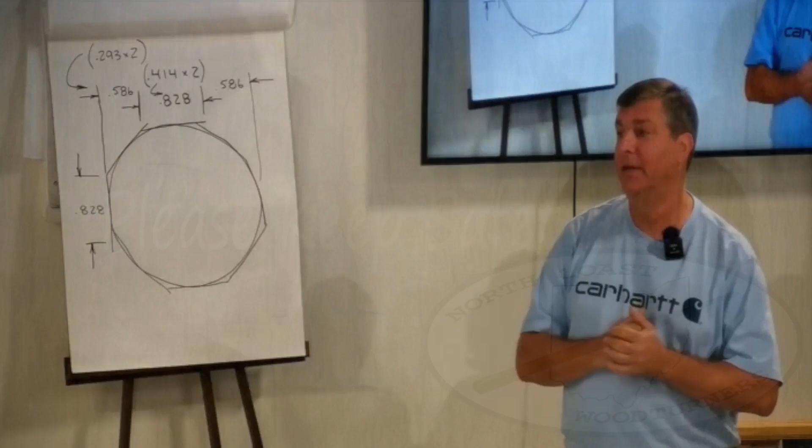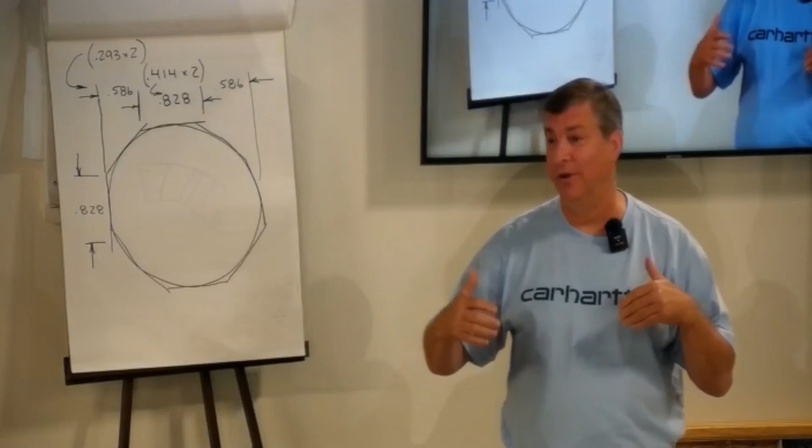I am from Erie, Pennsylvania. I am not a professional woodturner - I'll repeat, I am not a professional woodturner. So if you've had Stuart Batty or Nick Agar or Johannes Michelsen come in, they always talk about how they were an apprentice and how they grew up and learned. I've only been turning for about 5 years, but I want to give a little bit of background. I have been doing some woodworking, so I'm going to talk to this, but I wanted to give a little background on myself.

Again, I'm not a professional woodturner, I want to calibrate your expectations. But I've been woodworking for 45 years, starting in high school. I'm the president of Presque Isle Woodturners in Erie, PA. We have about 75 members, so we're a growing club. I'm taking great notes about your wonderful setup here and all the things you're doing to share best practices.

I attended Penn State University. Sorry, I know I'm in rival country here. If you go to throw tomatoes, wait till I'm behind the glass. Okay.

I went to Penn State. I have a Bachelor of Science degree in Industrial Engineering, a Master's in Manufacturing Engineering. That was my career. I worked at a company called Lord Corporation, since acquired by Parker Hannifin - there's probably people familiar with Parker Hannifin in this area. I worked there for 35 years and retired a year ago. I stayed after the acquisition, worked the transition for 3.5 years, and now I'm retired. I have 3 children, 2 grandchildren. My children all have done woodworking and turning.

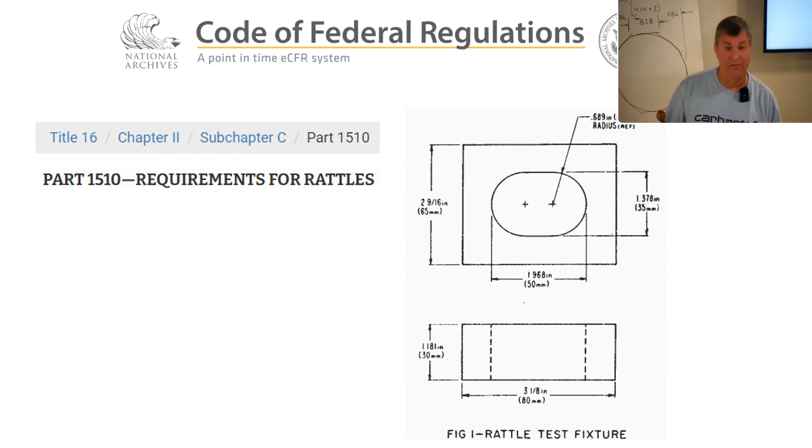So we talked about the design of the rattle. You want the spheres, if you will, to be no smaller than 1 3/8 inches. I go bigger just to be on the conservative side, and I'll talk about how I lay it out. I've got a rattle here with 4 rings, and I've got a rattle with 3 rings. You could make one smaller, but that would limit the number of rings you could get in between the 2 balls, the 2 spheres.

So we're going to mount the material, rough it to size, and then there's two main parts of this project. One is turning spheres, and I'm going to talk about how you turn a sphere without a jig, how we can mathematically lay out and turn a sphere. I like the 2 pieces to match on the ends, so I lay them out carefully and turn the spheres. Then we'll rough the rings to size, and then we'll turn captive rings. Those are the 2 main parts of the project: turning the spheres, then turning the captive rings.

And then there's nuances on how to sand and finish, because once you cut those off, they don't behave real well on the lathe. You need to manage those, and I'll talk about different ways to do that. So the piece going around, the one I'm holding, is cherry, and that's what I'm going to turn today.

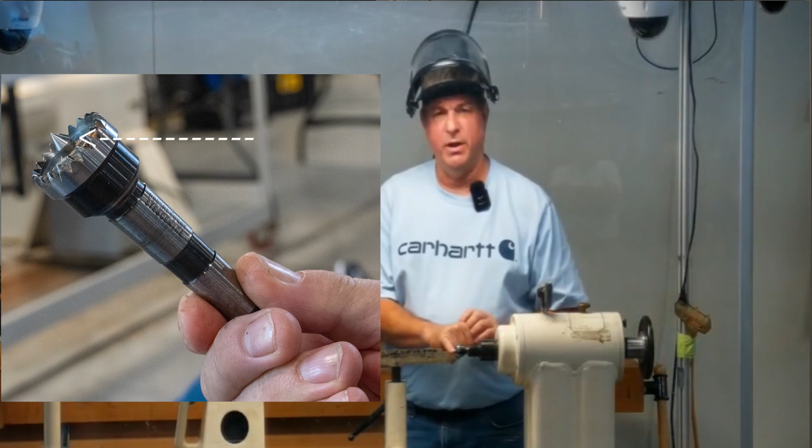I've got these mounted between centers. I use step centers, spring-loaded step centers, just as a safety precaution. This step center, this pinpoint here, the center on here is spring-loaded, so as I poke it in, it's spring-loaded, so it moves in and out. Now this one is a solid drive, running from the drive head. This one has bearings in it, so it's spinning. So I use the 2 step centers, and the main reason is for safety.

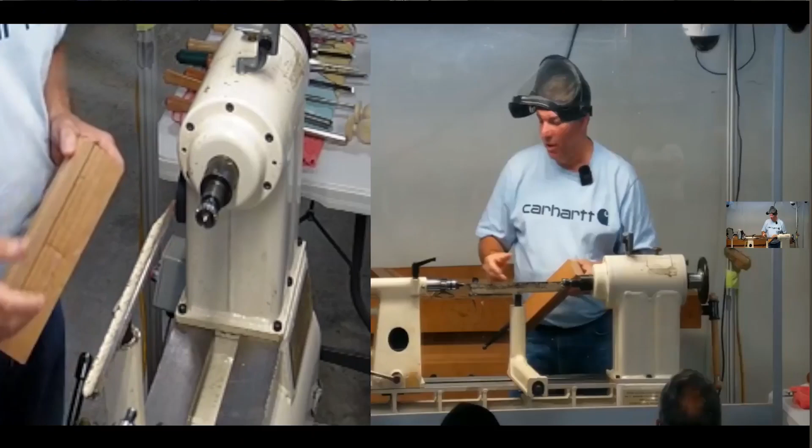If I take too big of a cut and it wants to grab, this spring-loaded center will allow it to slip, so the wood just slips on itself rather than becoming dislodged. These are number 2 Morse taper. You can get these at Woodturner's Catalog—I'm guessing Sorby sells them too—but I like these to start.

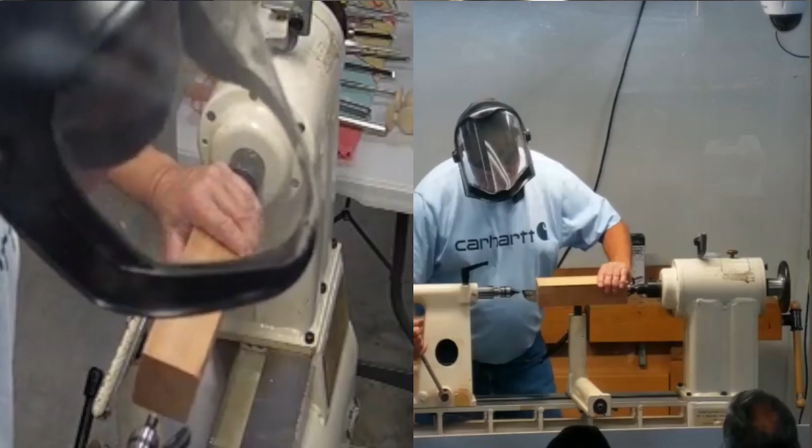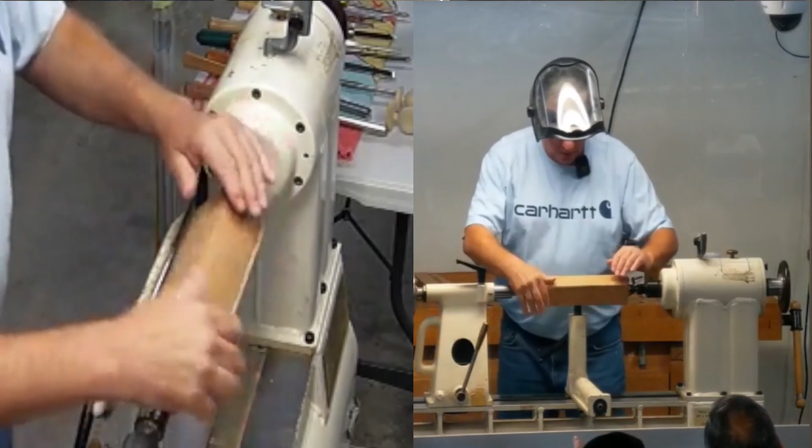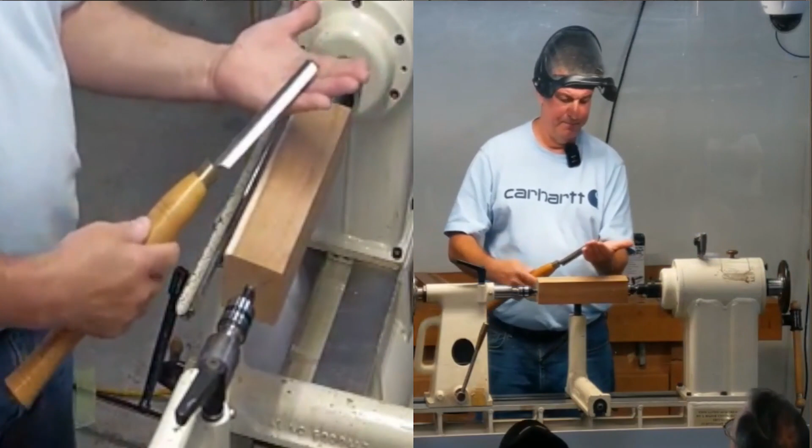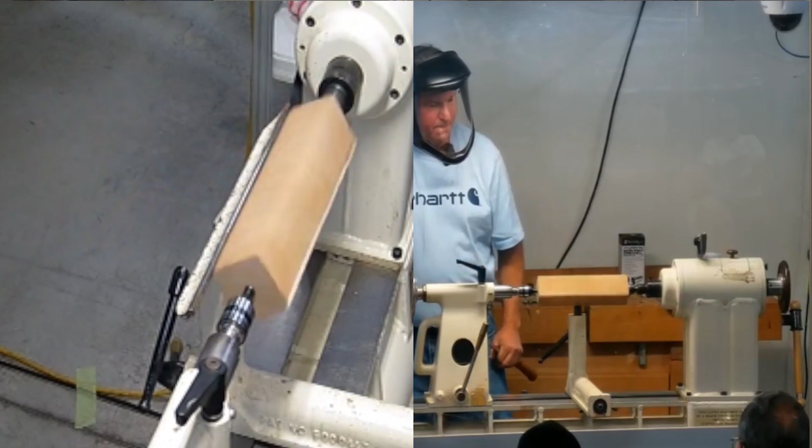So I'm going to remount this. Okay, I've got my tool rest positioned slightly below center. I'm rotating my piece to make sure I don't have any obstruction between that and the tool rest, and I'm going to go to a roughing gouge, just a standard roughing gouge, and basically turn this round to start. It's a spindle, not a bowl, so I can get the starting speed up pretty good.

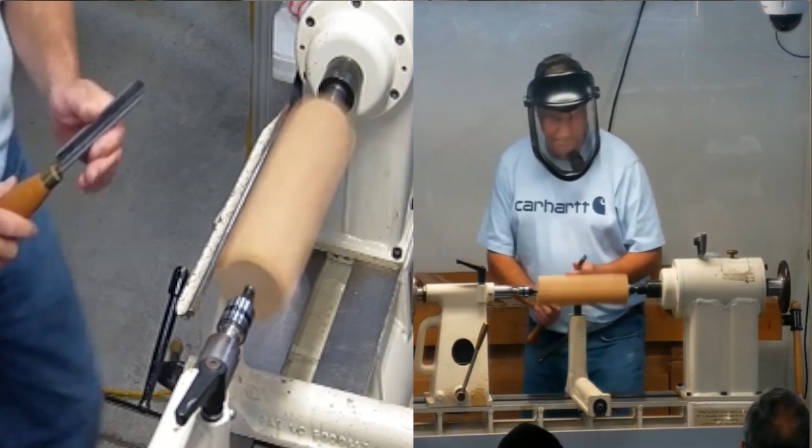I'm anchoring the tool on the tool rest, so the ABCs of turning: anchor, ride the bevel, and then cut. I'm trying to anchor on my hip with my right arm, and I'm just moving my legs to rough it. This piece started out at 2 1/4, so I'm going to rough it down as close to 2 as I can.

Okay, I still have some square spots on it.

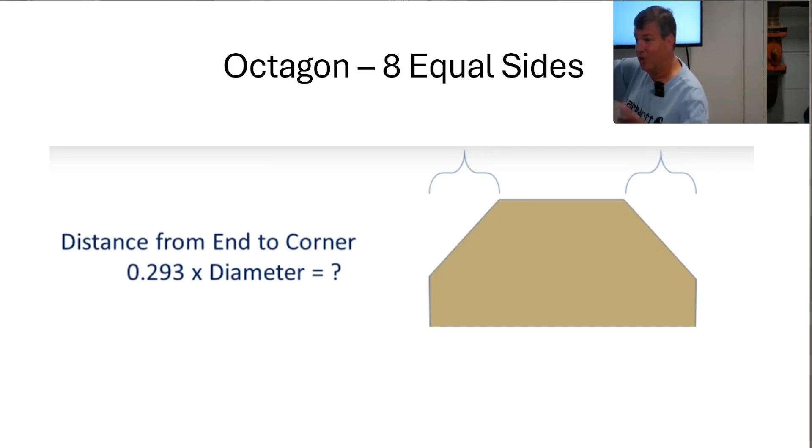The distance from the end to corner, from this corner to here, is 0.293 times the diameter. That's always the same. The only variable is the diameter.

So if you look, here is the octagon, and here is my sphere. The inner leg is 0.414 times the diameter. The outer side is 0.293 times the diameter.

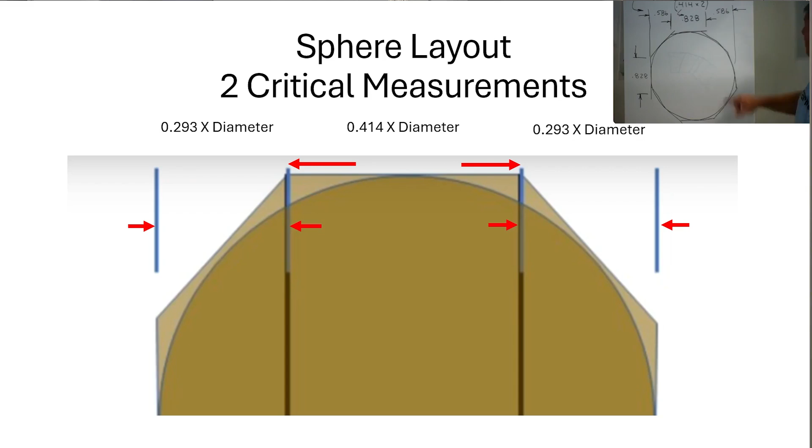So here's the sphere I want to turn on the end of the rattle. I want 2 inches, so 2 inches times 0.414 is 0.828—that's the leg of every side of the octagon. And 0.293 times 2 is 0.586 for these two dimensions. If you add all three up, it comes out to exactly 2 inches. But the formula to remember, no matter what size sphere, is 0.414 times the diameter.

So for us, we're just going to remember this today because we're turning 2-inch spheres. Is everyone okay with that?

Now, for those youngsters in the room that have geometry, this is Pythagorean's theorem, and I'll have one of you come up and explain how it works. I don't have any volunteers—you're going to have to trust me that the math works. Those formulas work for every diameter, and I'm not making it up. That's the Pythagorean theorem. There'll be a quiz at the end, but we're going to move on now.

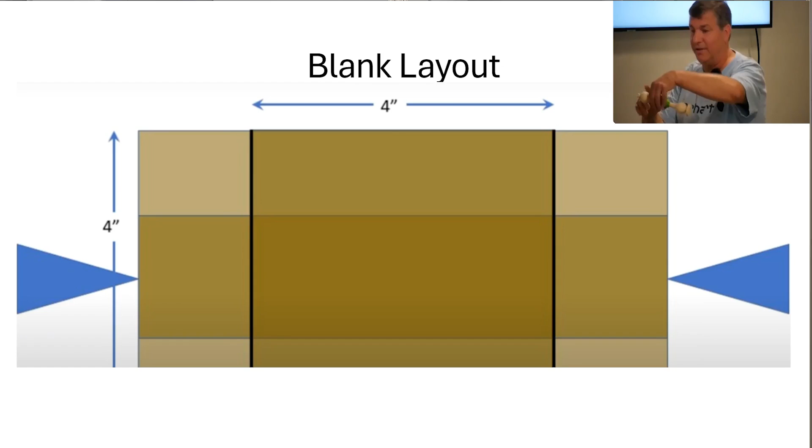Next slide, please—so we're going to lay out our blank. Now this is for a general sphere, not a double-ended one. If we made a 4-inch sphere, that's what my slides are oriented to. Your blank layout would be 4 inches here and 4 inches in diameter.

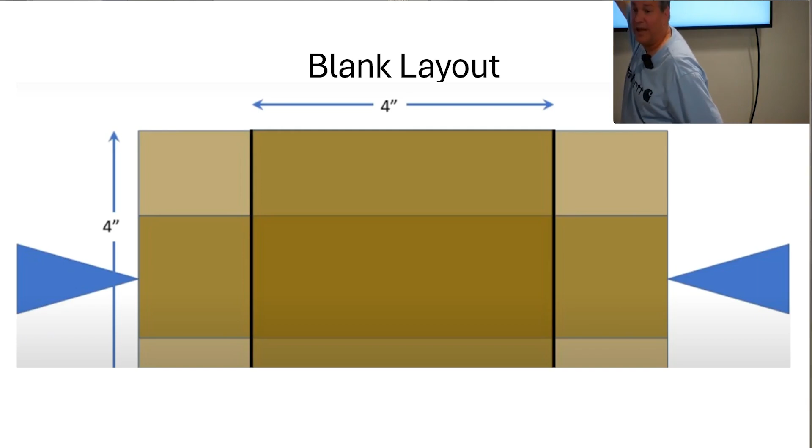One of the steps we're going to do is, for a 4-inch sphere, one side of the octagon is 1.656. If you turn this diameter to 1.656, now you have that side of the octagon defined. So this is 1.656, this is 1.656, and so is this.

Does that make sense? Everyone following? Again, I don't want you to get bogged down in the math. When did we jump from 2 to 4? Great question—I didn't modify my slides. I did a presentation at another site where it was a 4-inch sphere, so this is for that purpose. We're going to stay with 2, but I wanted to show that when you turn this diameter, that creates the sides of the octagon. But now we're going to stay with this math. Good question, sorry about that.

This is a bedan, B-E-D-A-N. I'm sure many are familiar with it—it's basically a double width parting tool. I like to use it because it's a little stiffer. So that's what I'm going to cut to size.

I've got my calipers set exactly to 2 inches, and so I'm going to rough the ends where the sphere are down to 2 inches. Actually, I'll take the opportunity to lay this out now.

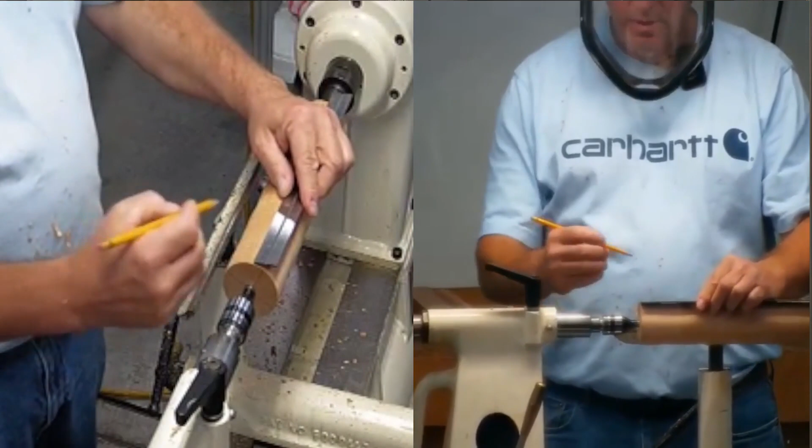So I give a half inch at this end for clearance, for something to have my tailstock mount on. Then I'm going to put 2 inches for my sphere. Okay, this is kind of what I'm laying out. My cherry's a little bit bigger, but I've got 2 inches here for this sphere, a little bit for this leg.

Then, because this isn't a pure sphere, it wraps down into the flat spot, so I leave another 3/4 of an inch in here to transition from the sphere into the handle.

Then I'll mount from this end. But this end, I want to give a quarter inch for my tenon, then another half inch, and then my 2-inch sphere, and then my 3/4 for transition. That leaves all this material in here for my rings, the rings I'm going to turn.

Okay? Is everyone following so far? So this from here to here, actually from here all the way down, is where I want it to be 2 inches. I'm going to go in reverse.

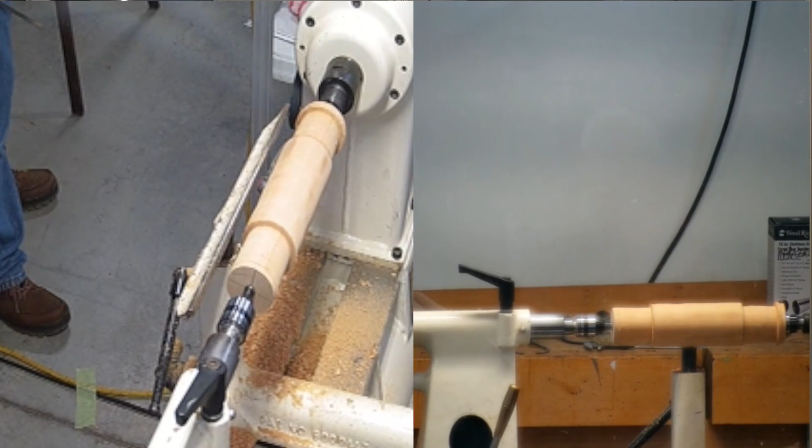So we'll recap a bit. Here's my tenon. I left this thicker so I have a shoulder to put it up against my jaws. This whole length is roughly 2 inches. This is all 2 inches. The 2 inches is the final shape of the sphere that I want. So I've now cut this down to the point where this math applies. Does that make sense to everyone?

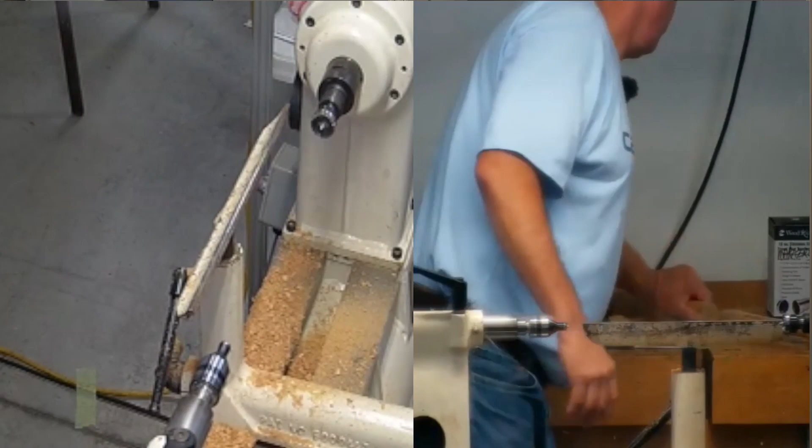I'm going to now convert from between centers. I'm going to go to my chuck, so I'm just going to put my chuck on.

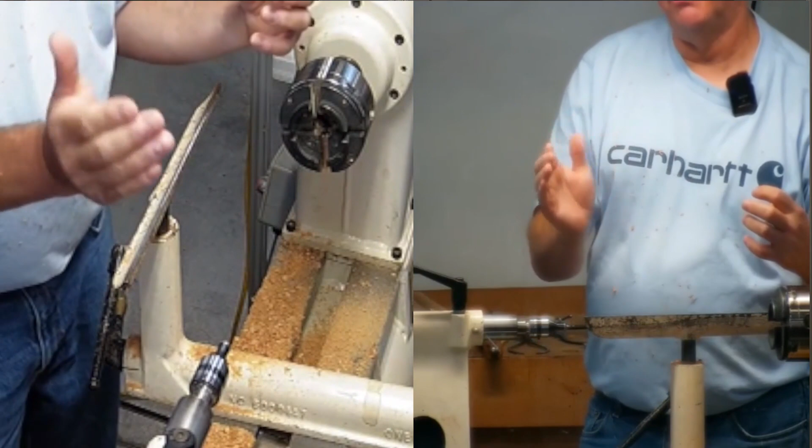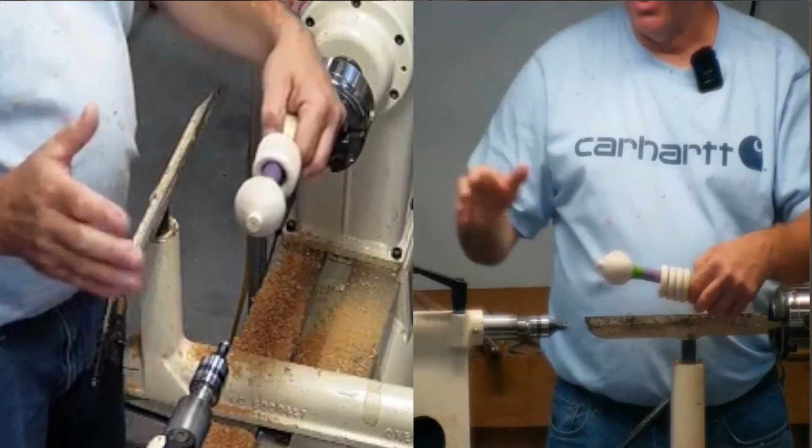Eventually, when I go to cut that off, I want to completely expose this end of the sphere so I can sand that end and make it completely spherical. If I was still holding it with the stem center, I couldn't cut it off. So eventually, at the tail end, I will push that away, finish this off, and just sand the back edge. Does that make sense?

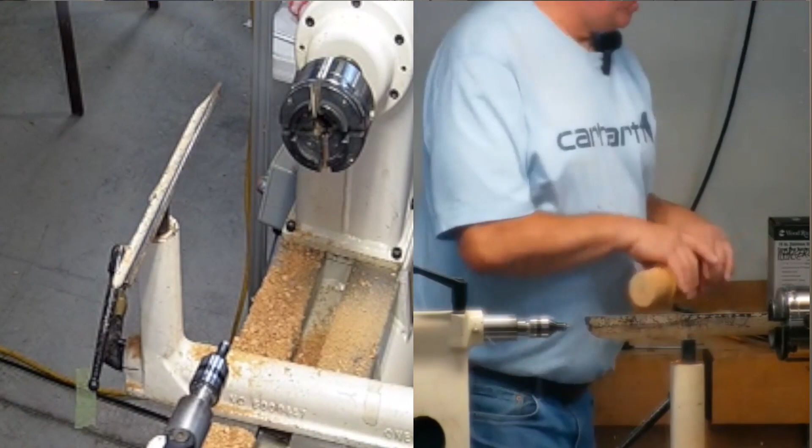I've got it loosely in the chuck, and I'm going to put a little bit of tailstock pressure to seat it into the jaws and then tighten it.

So I'm going to go back to laying out. I had a 1/2 inch here. Let me find my... there's my sphere.

Okay, now that's at 2 inches on both ends. Now I want to lay out my rings. I'm just laying them out for visual purposes, but then we'll go back and cut the sphere. So the rings, I'm going to put 3 on here. The main point is, and actually this is going to be a really long rattle. I could probably shorten it up some, but for the purpose of the demo, it's going to be a really long rattle. Actually, I could go 4 rings.

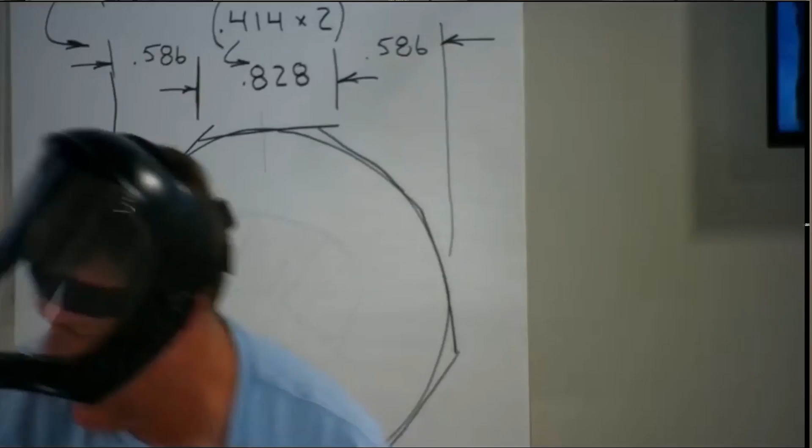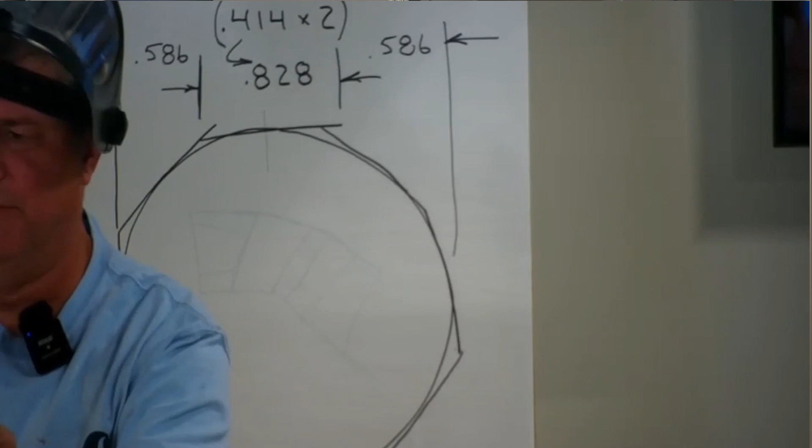Okay, now I've established the outer edges of the spheres. Now I want to establish the inner edges of the spheres, but again, the shape of this is not intended to be a sphere right down to a flat part of the handle. It's kind of a smooth slope. If you did that, it would look like a barbell, which might be a fine design, but I like to transition it smooth. So I don't go all the way to this diameter when I make these two cuts.

And I'm visually leaving stock. I'm just being conservative. I'm not going even close.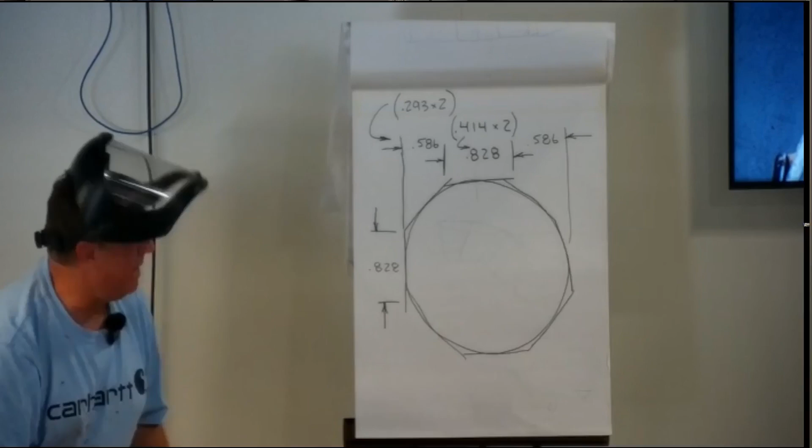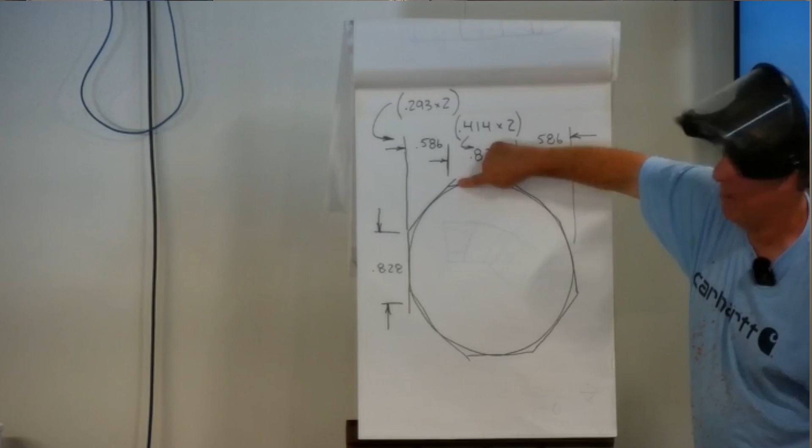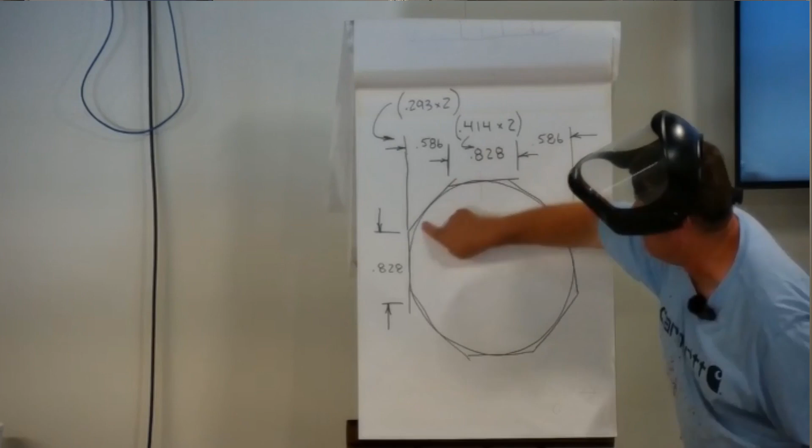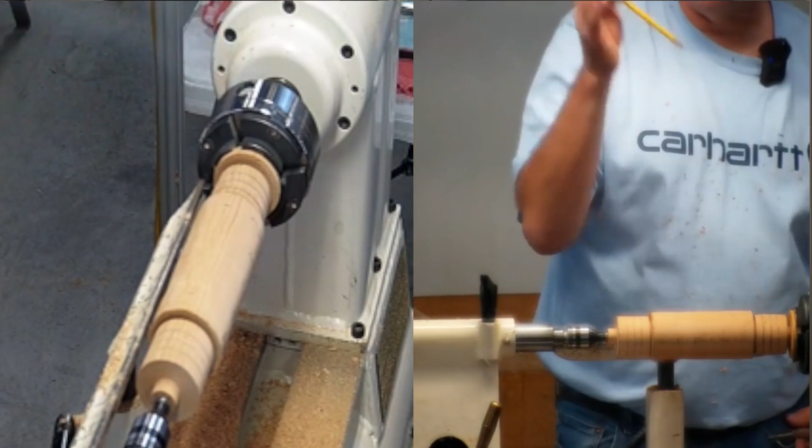So the next step is, if we cut from this point on our shape down to that point, just a 45-degree angle, we cut it off. That's starting the shape of the sphere, and we just don't want to dip into here and cut the corner off the sphere. So I'm going to use a spindle gouge, and I'm going to cut from this line down to this line on a 45-degree angle. Same with over here — I'm cutting the ends off that octagon. Make sense?

I'm just going to put a pencil line there so I could see it a little better.

There's probably members in the audience that could turn this sphere freehand and it would look perfect. I'm not that skilled yet, so that's why I take the time to lay it out, because I want them to be the same on each side. I've cut that, and what I typically do is get it close, then go in with a skew and use it as a scraper, a wide skew, but with the bedan, you just want this to be flat and not scoop.

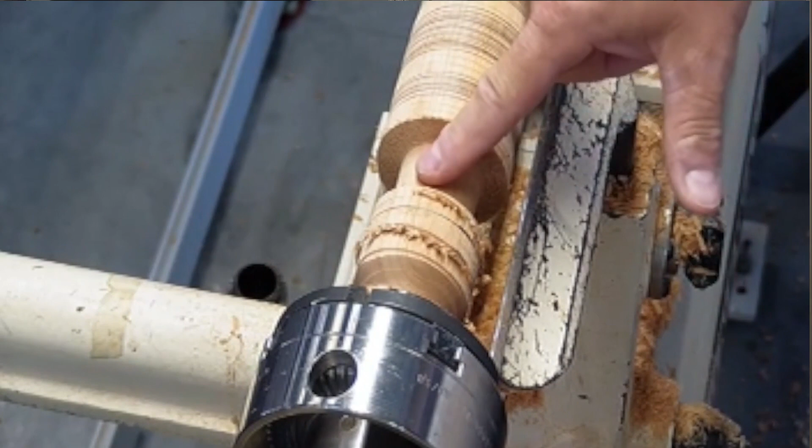Now, I cut this side off of the octagon. I need to cut this side off, okay? But remember, I didn't take these two sections all the way down to the 0.586 because I want to leave room. So I'm not going to cut at a 45-degree angle. I'm going to get it there, kind of meet up where we're at, and then later work down the transition.

Okay, we got our 45s. Now, doesn't look like a sphere yet. It is still boxy, it's an octagon. I just removed one of my lines.

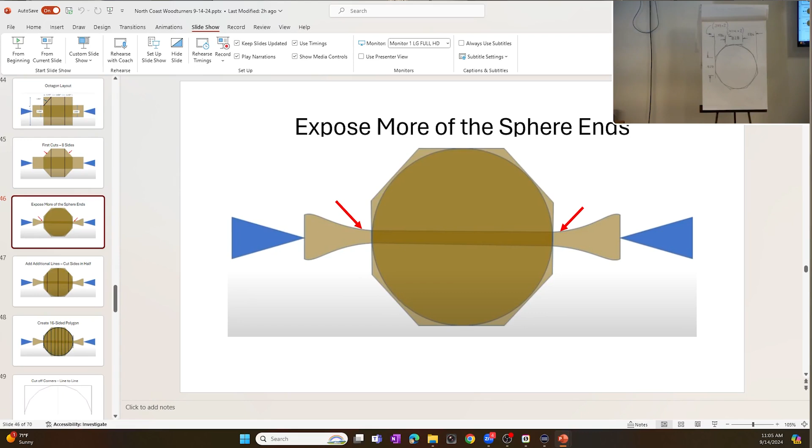So I'm going to go back, if we could, to the PowerPoint for a second. So here's where we're at. Again, imagine this was one end of it. I've got this side completed, that cut. So it is an octagon at this point, one on each end. Okay, if we can go to the next slide, please.

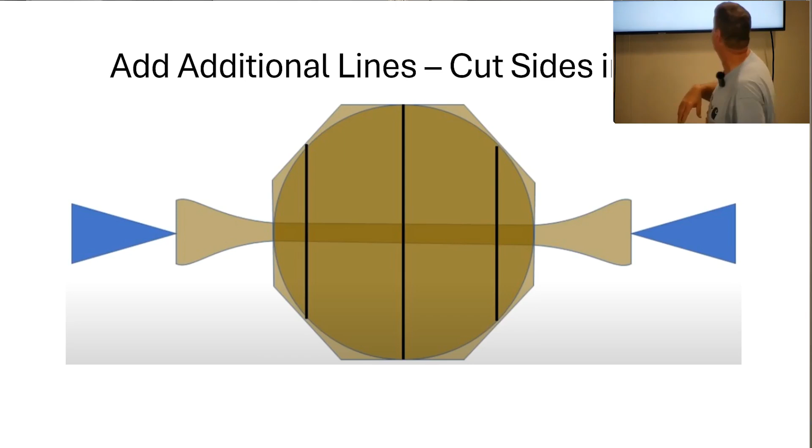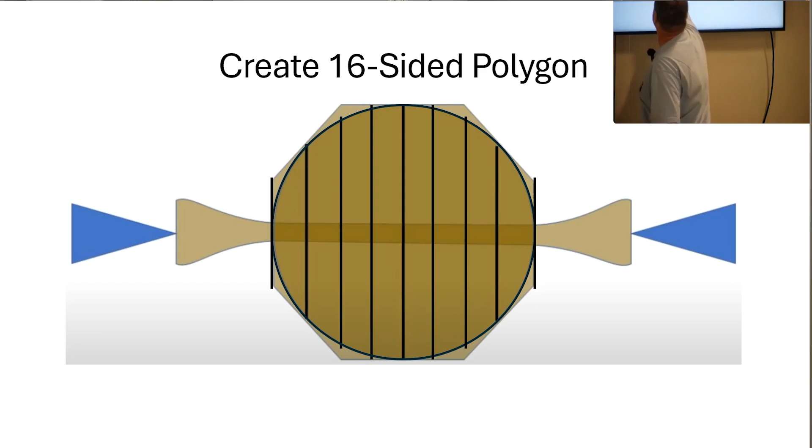Now we add an additional set of lines to turn it from an 8-sided object to a 16-sided object. So we're going to add additional lines. One more slide. So basically, if this is 0.828, if you cut that in half again and go to 0.414, that is where all these lines are established. Okay, so I'm going to go to that.

I still have... actually, I moved them. Set these back up to... actually, forgive me, I cut 0.414 in half, and it should be 0.207.

So I'm going to measure here. Now I'm splitting these in between. And now I could go down the sides.

Now, you'll see in a minute, for a sphere this size, you don't need to divide more than this. But if you turn a sphere the size of a basketball, you need to keep subdividing to get closer and closer to a sphere. I've got a picture when we finish up there, but I'm just going to put these lines on.

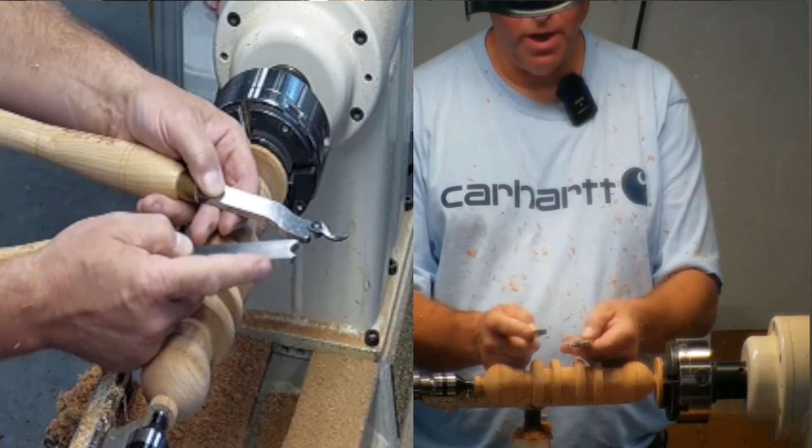I've got a beading tool, which is not absolutely necessary because you can roll a bead, but the thing I like about this is it matches identically the captive ring contour. So if I'm cutting the ring on the outside with the beading tool, it matches identically to the shape of the captive ring tool. So what I'm going to do next is use the beading tool to shape these into a final shape.

So this is a 1/2 inch beading tool, so it's going to create a 1/2 inch radius on this, and then the captive ring tool will come in and create room for it, but it's going to come in and reach behind the ring, and with the tip of this, it will cut in behind the ring, and you work from both sides to cut it down to a very thin sliver that's supporting it, and then you'll cut it off.

So the first thing I'm going to do is just rough one out, or actually finish it with this. I just rotate it slightly.

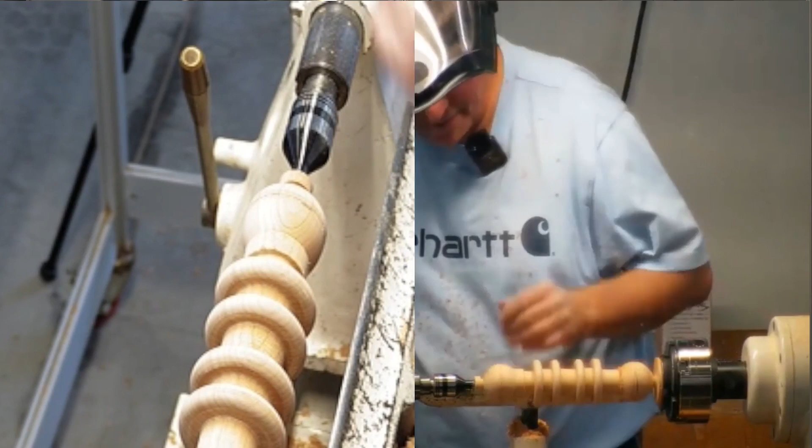So I'm going to start to walk in, and basically I am cutting with the top tip of that only. It's a scraper, it's shaving. When I get in there, I will even start to rock it or rotate it a little bit to find the sweet spot where it'll cut and throw nice shavings if it's sharp and behaving itself.

Then I'll flip to the other side, and you have to flip the tool over. Honestly, this could be delicate. I've broken more than one ring. The one thing that's easy to do is get this ring in behind and say, well, I'm just going to pull my tool out, and you just snap the ring off because you didn't reverse it out, okay?

And I am just a tad high.

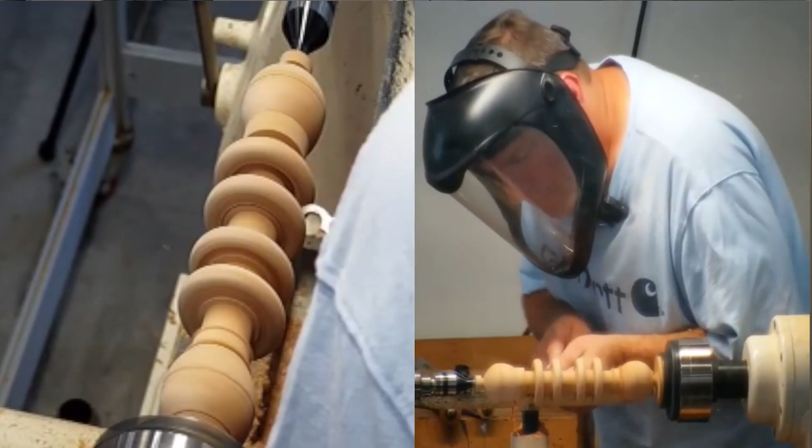Kind of see the rings that it pulls.

You can see I caught a little bit of the outside edge. You can come back in with the beading tool and clean that up a little bit.

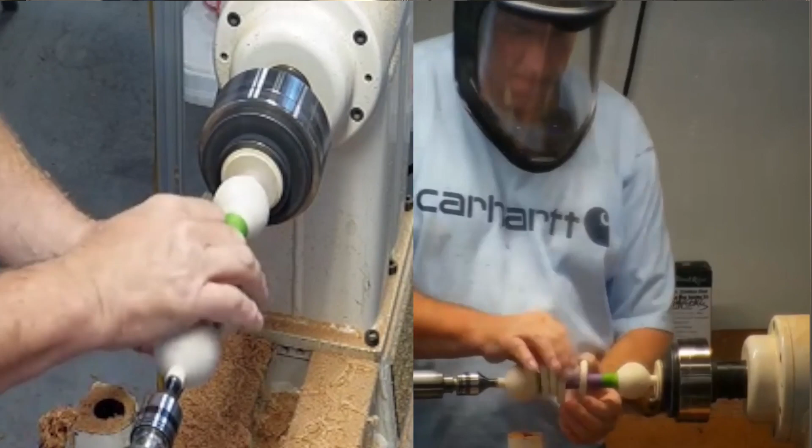Okay, I'm going to remove the tool rest. And for these, I'll show you how they dance around. I may tape them up, but I take one at a time, slow it way down. And I can get the web out of there. Then I rotate it side to side. It helps get the rounded contour sanded. Okay, then I will tape them back for this.

So then I take this cloth-backed sandpaper—if you don't use cloth-back, it will tear and rip pretty easily. But if I want to get down to 180, 220, I'll take a piece of this, put it in, and the grit on the sandpaper actually helps. And if I rotate it, I don't know if you can pick up the grain, but if I just slide this through, I can get a rotation where I don't have to continually rotate it.

So I can sand the inside of it. It takes 5 minutes a ring, but you can get a really nice contour on the inside. You can keep them rotating, and it helps keep the ring pretty round throughout the cross section. Again, if you don't use cloth back, it would have torn in half by now, just because I'm pulling on it fairly well. But that's the way I do the finish sanding. Once I get done with 100, I'll go to 150 or 220 and just walk these through, and they come out pretty well.

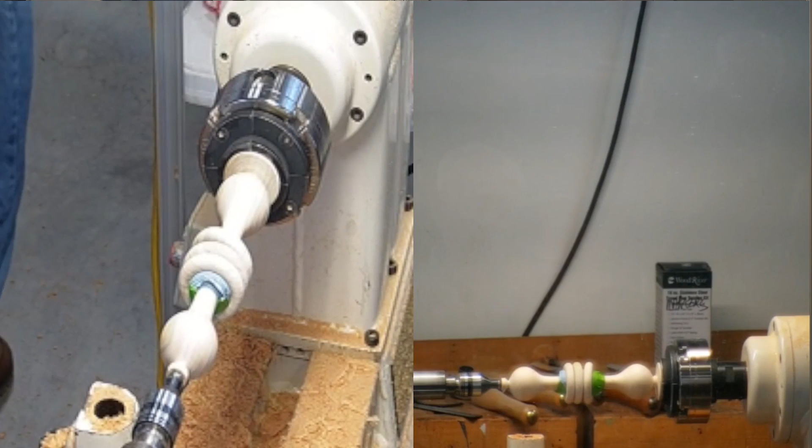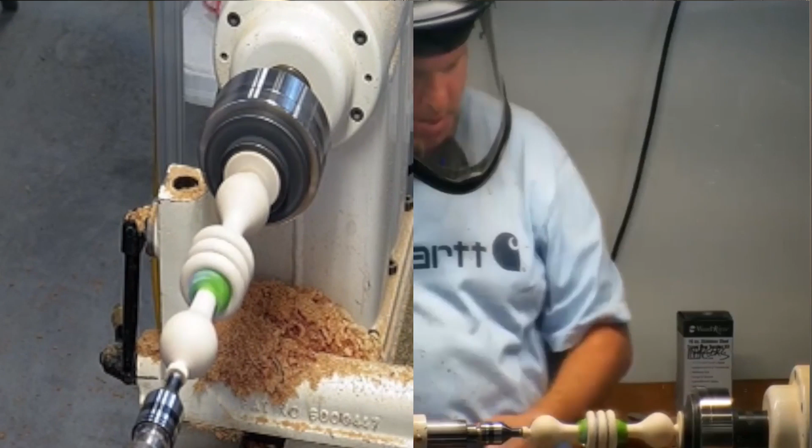So these, I'll just get a light piece of sandpaper here. Again, the only thing holding these is the friction between the paper towels and the inside of the ring. And again, this is typically—if it's not a demo, I'm going to sand those to 180, 220 as a solid ring. Yes, I will just use this. There's enough friction between the two that I could sand them.

If I want to focus on one, I pull that out and just focus on one, maybe working a little bit on the inside. But I found it to be a relatively safe way to do it and be able to sand the rings once they're cut off.

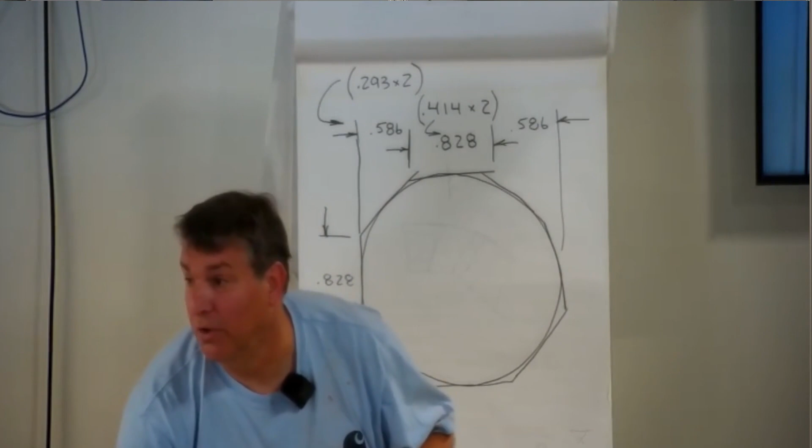Talk a little bit about finish. Because rattles often could be in the hands and mouths of infants, I choose something to be food safe. This one actually has a wipe-on poly, which—this is not an actual rattle, okay? But for ones that I either give as gifts or use, I use a mineral wax or mineral oil beeswax paste that is food safe, that could be applied and replenished. I found them to be pretty effective. They get a decent gloss, and they're food safe and able to be used.

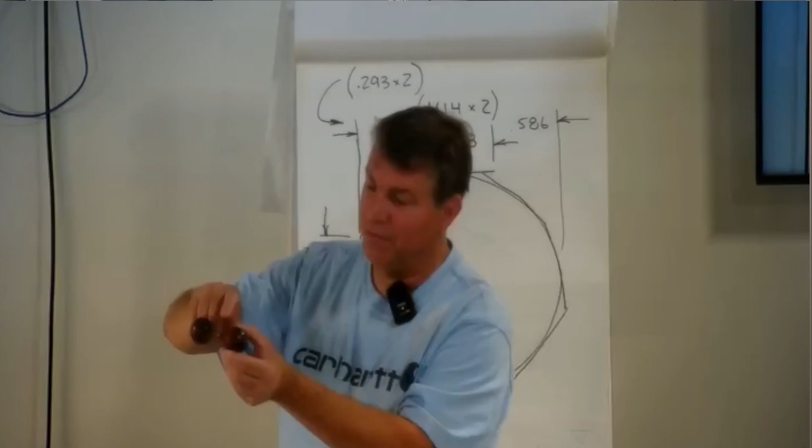There's one other, I passed this around. This is the other design. So this has 5 plies to it. The outside in this case was Padauk. The next layer in was Wenge, and then zebra wood on the inside, and then the same on the other side.

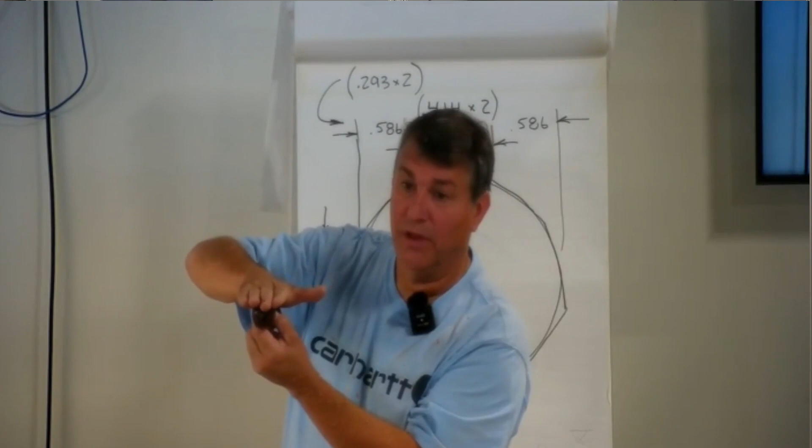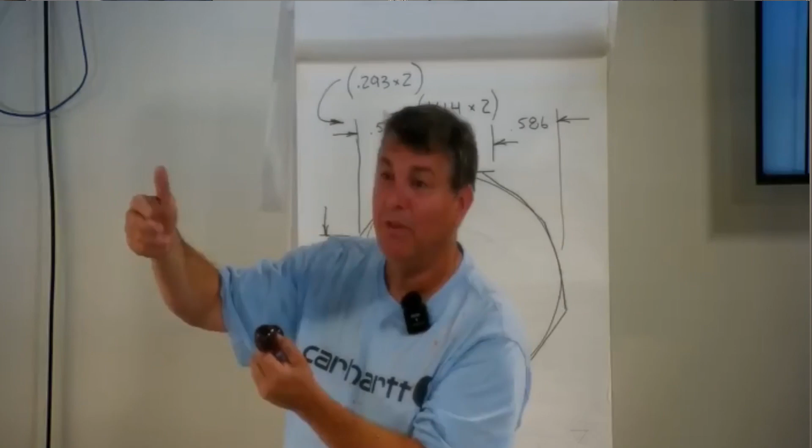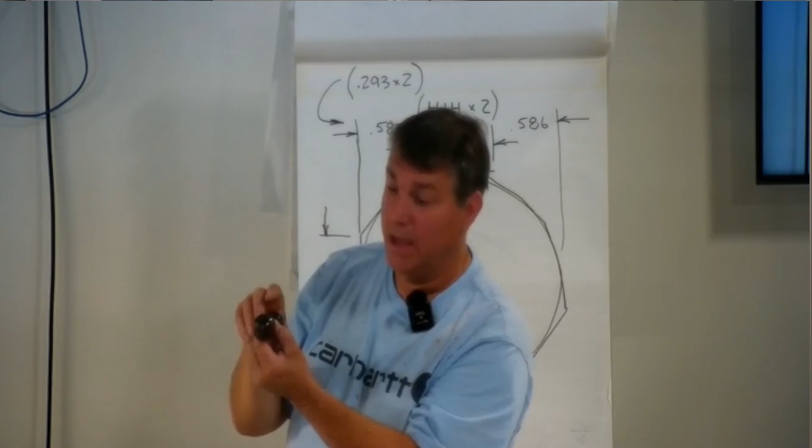The way I make these is I glue up one layer of the Padauk, Wenge, and zebra wood, and have that be one piece, and then a layer of Padauk and Wenge as a separate piece. Then I basically drill a hole down such that it doesn't come out the other side, creating a pocket on each side, and then put the other piece back on and glue it in place. I make sure whatever I put in there—beads, or I've used dried peas, they don't make as much noise as I thought they might—goes in, and I keep them glued such that in the deeper pocket everything sits in the bottom so they don't get tied up in the glue. Then once it's laminated, I go through this process on the lathe.

What you have to be very careful with this design is to lay out the center of that pocket very clearly, because if you get off by a quarter inch, you can turn your way into the cavity. That's what happened on this one—I didn't turn into it, but it got really thin, so I did a patch.

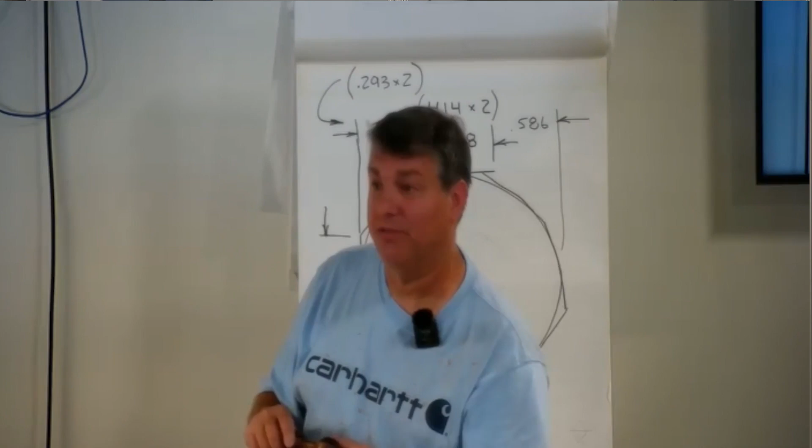So, any questions about rattles? Do you have any concern about the exotic woods? That's a great question, and I've never thought of it. I've never thought of that. But that's a really great question.

What's the answer? I don't know yet, believe me, I'm gonna look at that. There's a federal regulation about testing. Do you have to test the design, or test each piece?

It's essentially a gauge, an elongated pocket, not an oval. Theoretically, no portion of the rattle may fit through there to pass. The pocket is essentially 1 3/8 in height, and because I'm at 2 inches or 1 3/4 inches, there's no chance it could fit through there.

But I've seen other rattles commercially available. They might have a ball on the end, but have a key design on the bottom. And if that key design were small enough, it could fit through there, which would make it not recommended for children's use.

I actually saw, as I was preparing this, I happened to be with my grandchild earlier this week, and he has one that's essentially a base with a dowel, turned like a bowling pin, and sectioned. Part of playing with it is you dump the pieces off and put it back together in the shape of the bowling pin. Well, there were 3 pieces that I guarantee would have fallen right through the gauge.

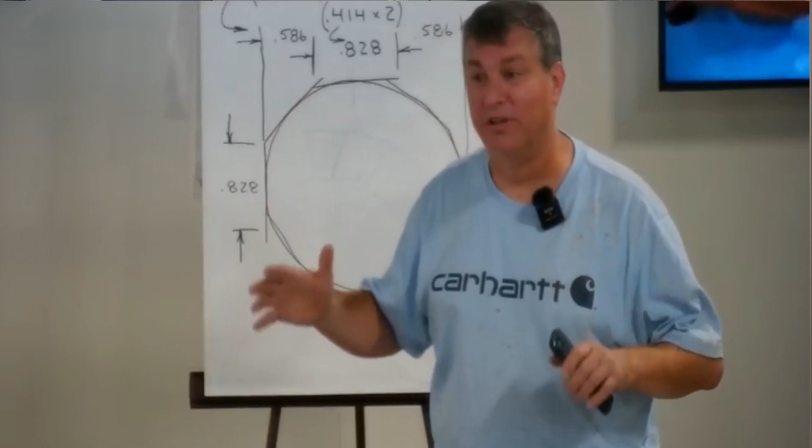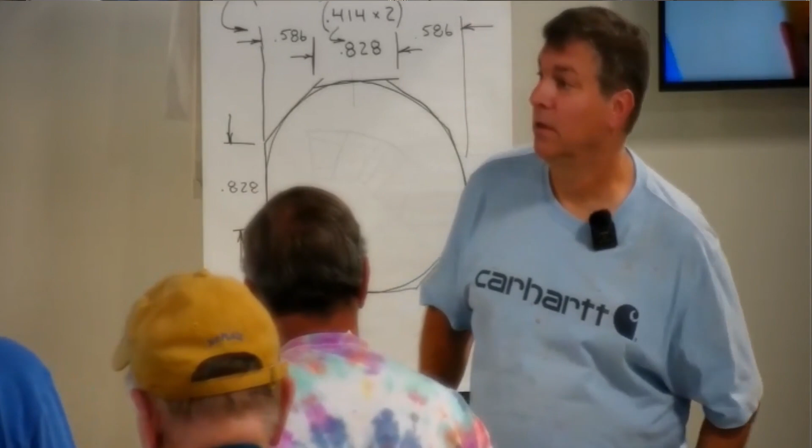This is important. I'd like you to think of a number between 1 and 10. All odd numbers, I'd like you to do this. All even numbers, I'd like you to do this. Okay, now hold that pose. Hold that, please, bear with me. Good, excellent. Okay, now you're wondering what I'm doing. You could have a seat.

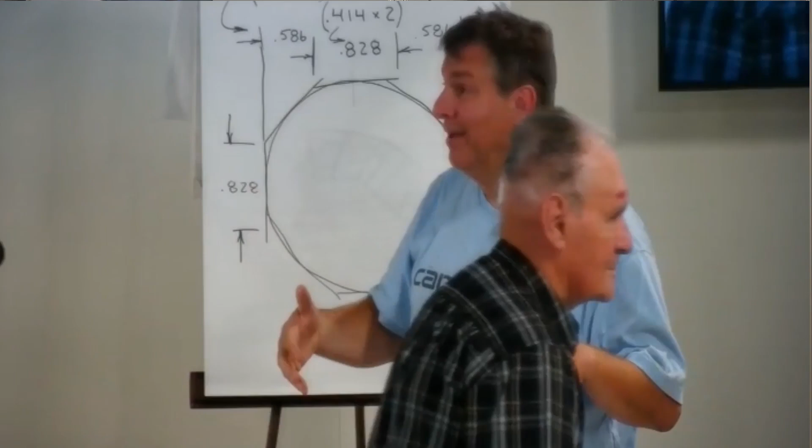My youngest son, who is a turner, knows about Presque Isle and North Coast, but he's been away at school, and he wondered where I was going today. I told him I'm going to demonstrate at North Coast, and he said, well, that's a big club, and they have a bunch of professional turners that come in that are really good. He goes, you might be out of your league. And I said, well, I very well may. And he goes, Dad, you're way out of your league. And it got to me.

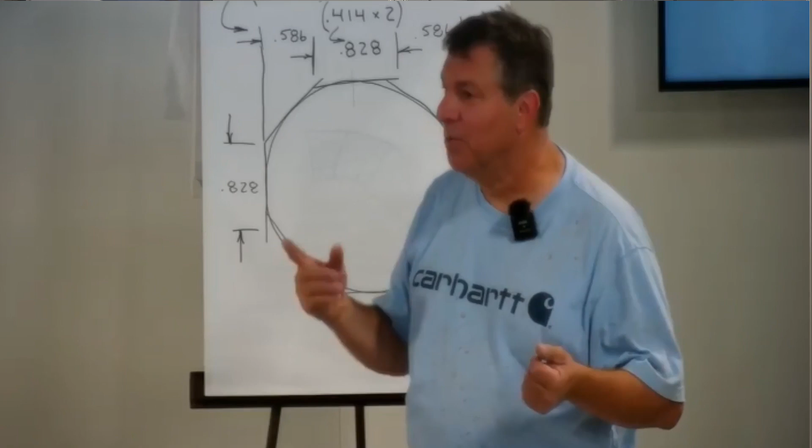And I said, you know what? I'll bet you a pizza that I can give the most inspiring, most passionate demonstration that I'll get a standing ovation. But he said I needed to provide proof. So thank you for bearing with me—I got my proof, and I will be eating pizza this evening. So thank you very much.